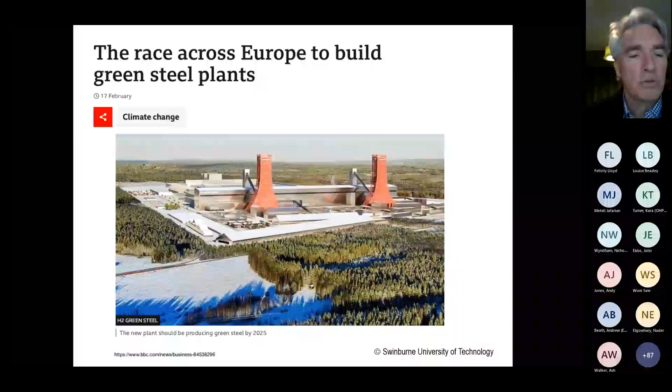So there's these new green steel plants, but then you see another story which came out a couple of weeks before that, about the Port Talbot Steelworks in South Wales. I've been to this plant a lot, I've lectured there, and I've done a little bit of research with the people at Port Talbot. This steel plant is an older plant. It's got, I'd say, fairly standard steelmaking technology that we're about to discuss, and basically the government wants them to go green.

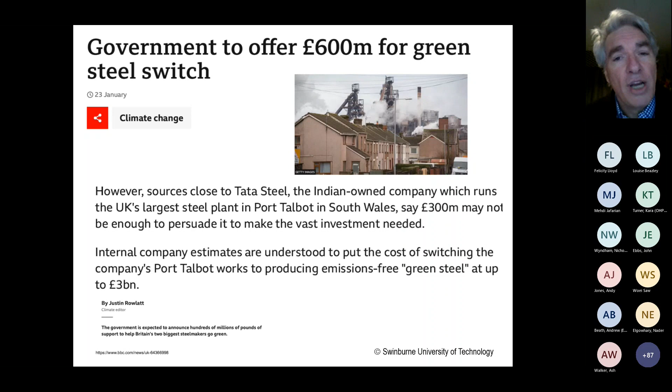The government's offering to put up initially £300 million, and then it looks like it's shifting to £600 million. But the management of the plant say it's going to cost £3 billion — I repeat that number because it's an extraordinary number, £3 billion — to be going green. There's obviously massive conversation going on about what's the future of the Port Talbot Steelworks. So in Sweden, we've got people building new greenfield sites, and in Wales, we've got people worried about an older plant surviving, and who's going to pay the costs and how they're going to move to some sort of green steel future.

Another very exciting announcement came just before Christmas — you might have missed it because you were getting ready for Christmas. Fortescue Metals announced they're getting together with Primetals and voestalpine, quite famous technology companies in the steel industry, to develop a fluidized bed process to make iron from Pilbara ores, the ores at Fortescue Metals' mines, and hydrogen. They're going to be building a pilot plant in Austria, and the intention is to establish whether this is a good technology for processing the ores in Western Australia. I'm sure every iron ore producer in Australia read that story with great interest — I certainly did. It's a very interesting and exciting investment. We're all going to be watching that with some interest.

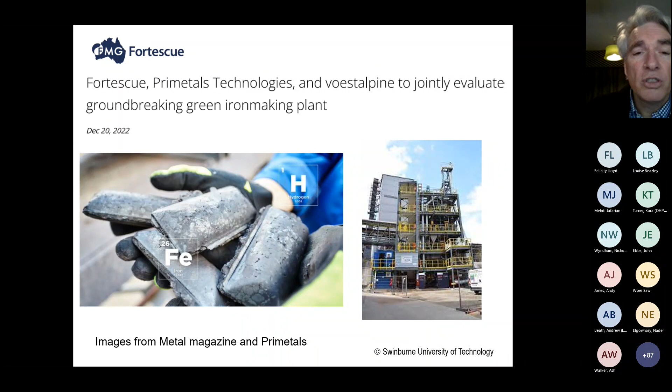Then this one is very recent — literally two weeks ago. This is a sort of disagreement, or at least some robust discussion, going on between BlueScope and the government, which made the media. Essentially what's going on is that BlueScope is planning to reline its blast furnace, which is technology based on coal and coke, and the government is trying to ramp up the rate of cutting emissions from large emitters like BlueScope by 4.9% each year until 2030. Basically, the managing director of BlueScope said this was actually threatening the viability of steelmaking in Australia. So, fairly serious words.

And I'm not going to walk away from that. I don't enjoy political discussions — I'm more a scientist and engineer — but I'm going to talk to you a bit about what the issues are there, about continuing with blast furnaces or moving to new technology, and some of the costs involved as well, which is obviously an important part of that debate. So I think first I'm going to go through a fair bit of technical detail, but I want to give a grand overview for a moment about what we're talking about here.

So you hear the term green steel. When you actually look into the details, it's really about green iron making largely, because what happens is we've discovered over a long period of time that the best way to make steel is to first make an impure form of iron from the iron ore — from a blast furnace it's called pig iron, but that's a detail. This impure material then goes into an operation where it's refined into steel. So essentially steelmaking is a two-step process: you make iron, and then you make steel.

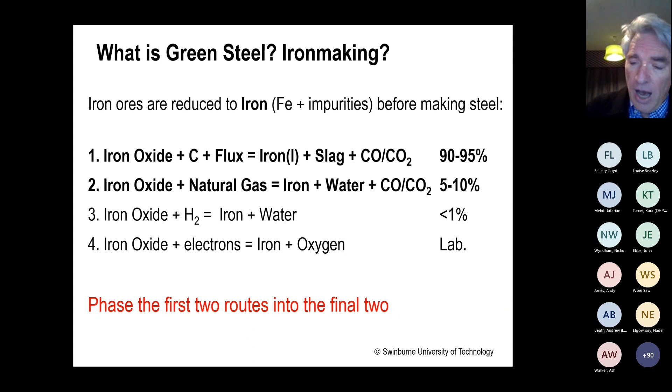What they're doing in HYBRIT, which is the process in Sweden, is getting the iron ore and bringing it together with hydrogen that's been made from renewable energy. From that, they make an impure form of iron called DRI - a solid material, not like a liquid like from the blast furnace. They then put it through an electric arc furnace, which is getting its energy from a green energy source, and then make different shapes and sizes.

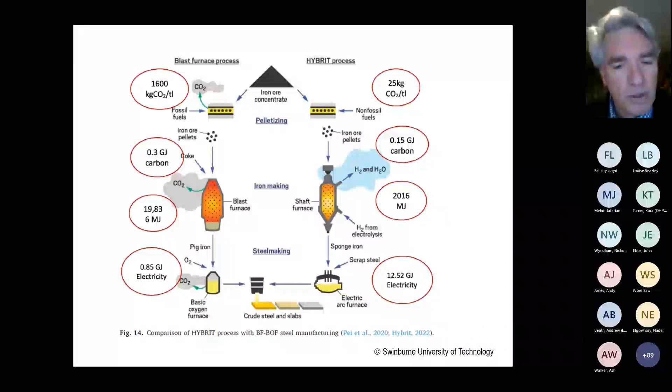So basically, what we're talking about is shifting from the left-hand side to the right-hand side. That's essentially what people are talking about. There are variations, but that's the essence of it, just to try and get that basic point across.

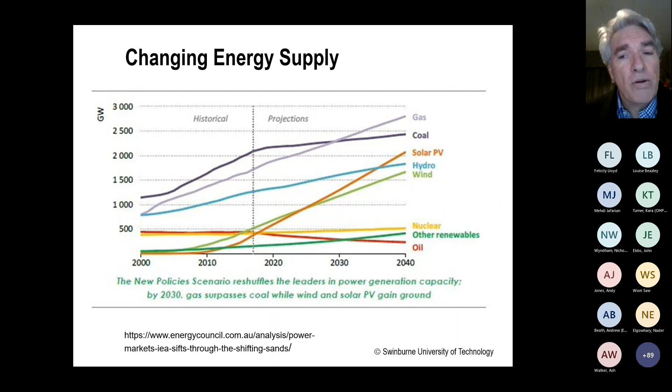Now, this has not been done in a vacuum - why are people doing this? Well, people are doing this because there's a general shift going on in our society towards renewable energy, and this is all about trying to affect climate change. There's a lot of debate in our country and all around the world about the pace of that and how long it will take us to get there. But it's undeniable that there is a general shift towards renewables, and that is also reflecting in heavy industry.

So people are looking at not just energy generation - they're now looking at all aspects of industry about which generates CO2. And when you look at this, you find that concrete, steel, and aluminium, which are three extraordinarily important parts of our infrastructure in the world, produce a significant proportion of the CO2 made by humanity. So what are we going to do to lower that down?

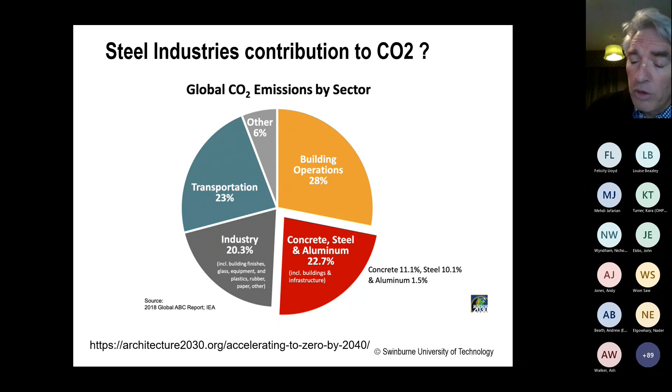They've done some calculations and they say, for us to be able to get to carbon neutral by 2050, we're going to have to reduce the CO2 from 1.8 tons of CO2 for steel down to about 0.2 — a 90% reduction. So if we want to achieve the goals of net zero by 2050 and avoid large temperature rises on the face of the Earth, we're going to have to cut the CO2 from steel by 90%.

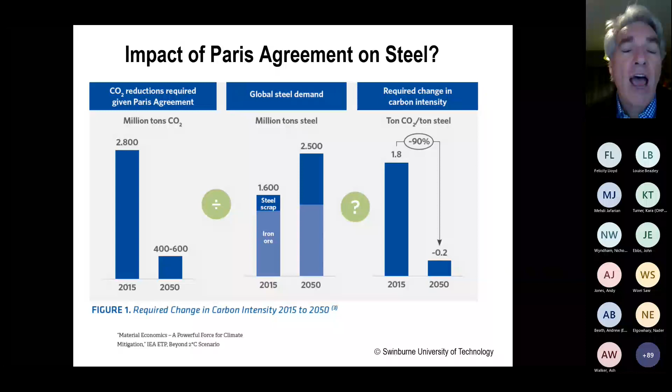Now, you might argue whether that number's right, but what we can all agree on is that's a very large change. This will not happen by incremental improvements. We will never achieve that by incremental improvements. We'll have to change our processes quite significantly. That's the major conclusion you reach from that.

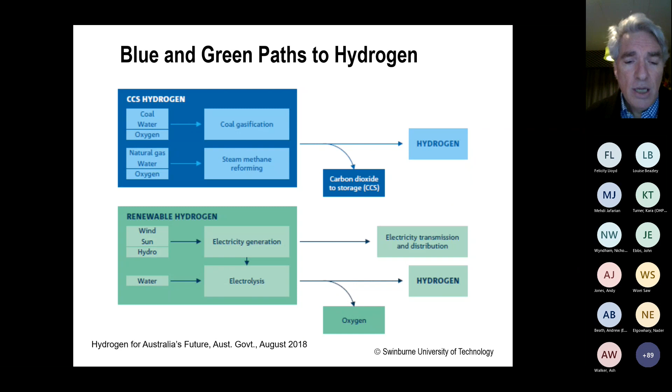At the same time, people have been proposing hydrogen as a route to not only make steel, but to generally be used in heavy industry. At the moment, hydrogen is dominated by production from hydrocarbons, and what we call blue hydrogen is where you capture the CO2, carbon capture technology, to make that hydrogen. What people are pushing for now very strongly is green hydrogen, which is where you generate the hydrogen from renewable energy, and your main products are basically hydrogen and oxygen.

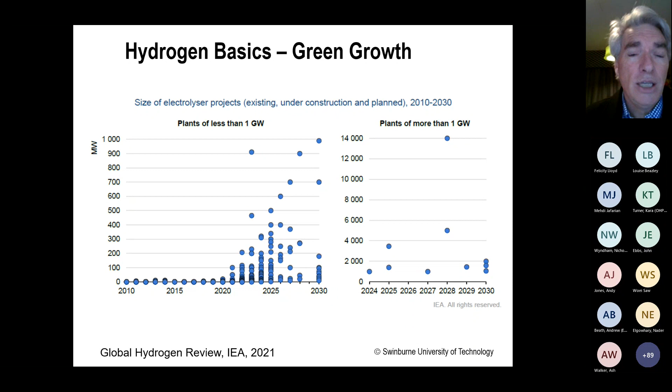There is a massive investment going on in Australia and around the world, because the current size of hydrogen electrolysis plants are really very small, but now there is investment in much larger plants. According to these sort of estimates from the International Energy Agency, we can expect really massive growth in hydrogen production over the next few years. Now, these diagrams I think are a little bit optimistic. I think some of you would be aware that there actually is quite a lot of supply chain issues with building these electrolysis plants. But I think what is not debatable is that we can expect a lot more hydrogen to be available in the Western world and in Australia over the next 5 to 10 years.

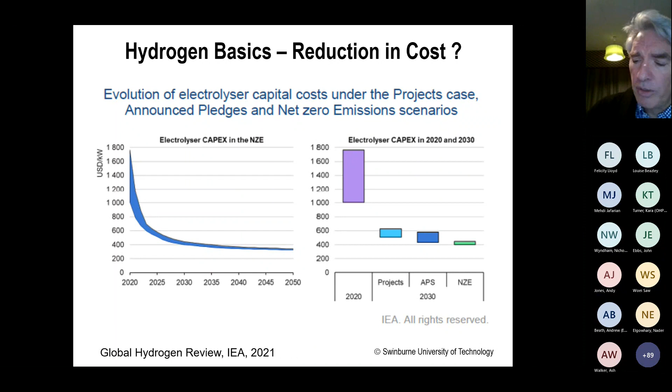I've done my own calculations on that, and to me that looks a little bit pessimistic. But you should know that at the moment a lot of hydrogen in the world is selling around about $4.50 US per kilo. So for us to get the cost down, we need to really dramatically reduce the cost of green hydrogen. There are some people who believe that we can get under $2 and even $1, and they think that will happen in the next few years — that remains to be seen.

I think the thing that is beyond argument is that basically nobody believes that introducing hydrogen will make steel cheaper. Everybody thinks it'll make steel more expensive. Now, that's a really important point because, say for example, you're operating a steel plant in Australia, and you go early with introducing hydrogen — you do it right now. Then that means you'll be producing steel that is more expensive than your direct competitors in Asia. So that's a really big issue.

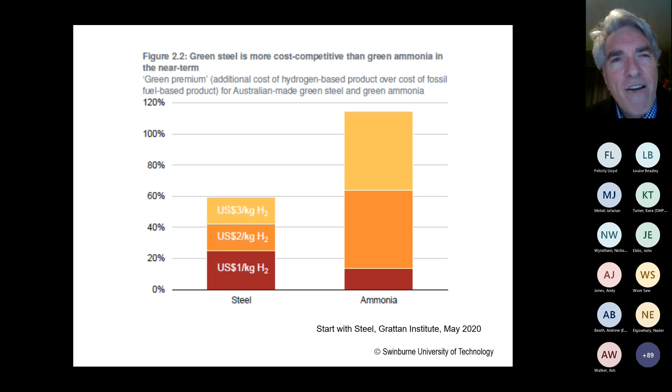Now, in Europe, they're saying that they're going to protect their steel industry against that kind of issue. So they're pushing strongly for the introduction of hydrogen, but they're also offering to protect it. So this is a very big political, social, economic issue in Australia. So the big picture is that steelmaking contributes a significant amount of the world's CO2. Some people say 7%, other people say as high as 11. I don't know which one's correct, but somewhere in that range.

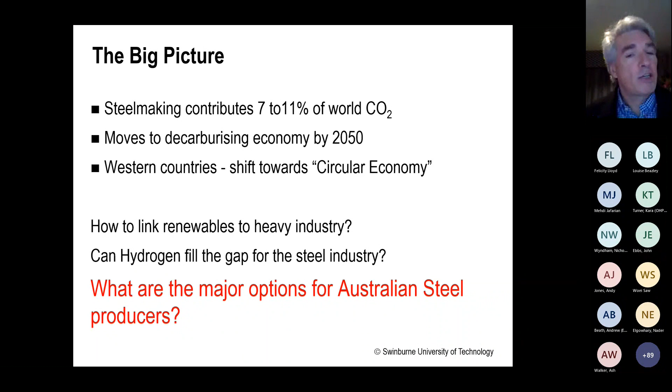And there's this big shift towards decarbonisation, and there's also a general shift towards the concept of a circular economy, where we are living off what we are recycling rather than constantly making new things. So there's a big challenge about linking renewables to heavy industry, and people thinking that hydrogen is the answer. It's one of the answers. And my question is, what are the major options for Australian steelmakers?

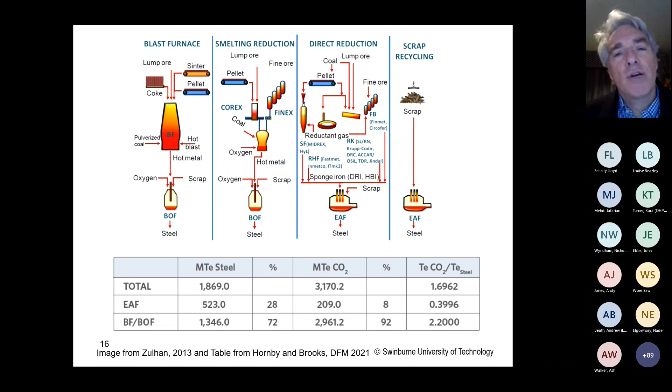So Australia produces 5.5 million tonnes of steel. That amazes everybody in the steel world, given our tremendous resources. That's a very small number for a country with outstanding renewable energy resources, outstanding coal, outstanding natural gas, and outstanding ore. But that's what we produce.

We currently have 2 plants using the blast furnace, one in Port Kembla and another in Whyalla. One of the most important things about the Whyalla one is that it's right next door to a significant magnetite iron ore resource, which, as you'll see, is an important point.

The 2 scrap melting plants, the Sydney one and the Melbourne one, have been designed around the scrap supply of those cities. So basically, when you have enough people producing scrap, you can justify economically building an electric arc furnace. I think it's inevitable that we'll have an electric arc furnace in and around Brisbane, or somewhere between the New South Wales coast and the Queensland area, because there's such a large population there that we'll inevitably be able to justify one.

So these are the 4 major plants. There are a couple of other specialty plants in Australia, but their production is quite minor compared to these 4 plants I just described.

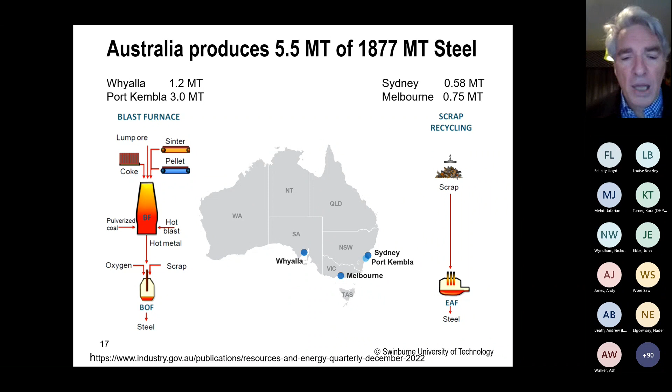We are maybe small in steel, but we're huge in iron ore. We're not only one of the world's largest exporters, we're also one of the world's largest reserves. So this debate we're having is not just important to our steel producers, it's also important to the people who are exporting iron ore. What Australia does in this area is of great interest around the world.

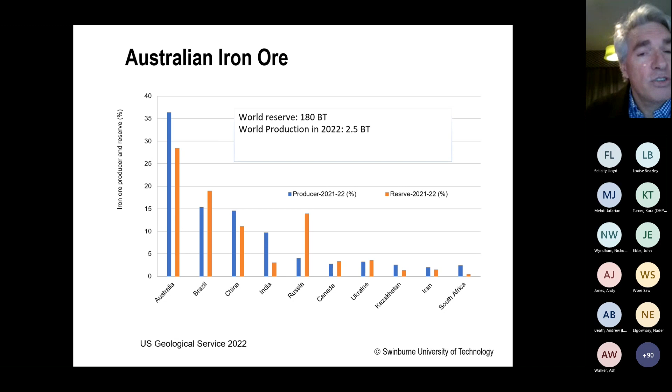One thing to realize about ore is that ore grade around the world is going down. Years ago, you could find ores above 65, 66, 67% iron, which are very rich ores. But now in Australia, for example, a lot of our ores are more between 62 down to 58, 57% iron. This is going to have a big impact on these different choices. So we're trying to bring hydrogen in at the same time that we are having declining ore grades, which is an important point.

The ores in Australia that we mainly export at the moment are mixtures of hematite and goethite, particularly in the Pilbara. But magnetite ores are also becoming important.

Historically, magnetite ores have been a little bit expensive to process. But one attractive thing about magnetite ores is their magnetic quality of Fe3O4 - that's why it's called magnetite - which means you can upgrade it using magnetic separation, so you can get much richer ores even if you start with a lean ore.

All the gangue minerals inside these ores add significantly to the cost of making iron and steel. So basically, a high gangue content means extra cost, as you will see as we discuss it.

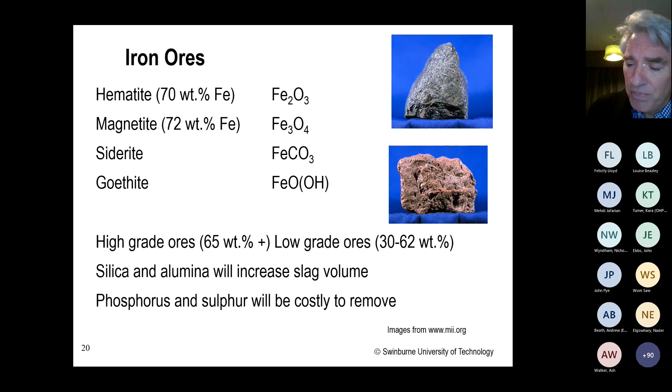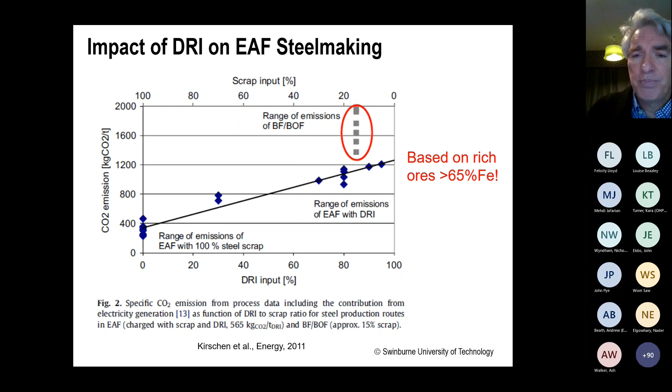We won't talk much about scrap today, but just something to realise is we don't have enough scrap in the world to supply our world steel needs. A lot of the scrap coming into the world is obsolete scrap, which has a lot of residues and troublesome impurities in it, making it actually very difficult to produce high quality steel. So it's unlikely we can answer our steel issues just by relying on scrap.

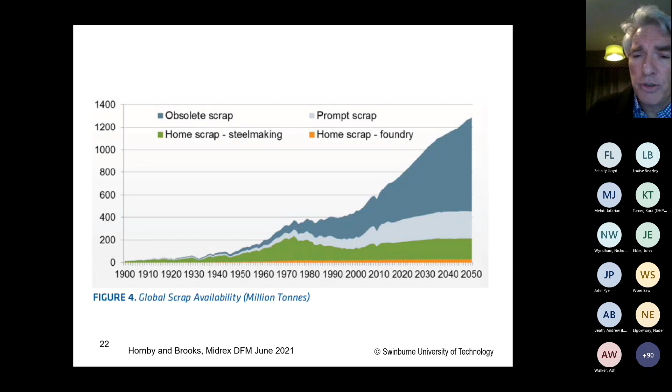We would really need a revolution in our scrap sorting technology. So basically, ores are drifting downwards in quality. The DRI is currently made from high-grade ores - that's what we currently do.

And it's not really clear exactly how the expanded DRI production, which is what we're expecting with hydrogen, will play out. Scrap quality is a major obstacle and an ongoing issue. And green hydrogen, as we've already discussed, is currently costly, and we're hoping it will go down in cost, but that still has to emerge.

So what are the major choices? I'm going to talk through each of these. One obvious one is electric arc furnaces switching to green energy. If we switch straight away to green energy on our Sydney and Melbourne plants, we will have a significant impact on the carbon footprint of those plants. So that's an obvious thing to do, and I believe it will happen.

The other option is for our blast furnace BOF operators to switch to a DRI EAF route, or to find a way of bringing more hydrogen into their blast furnace and more scrap into their BOF. Currently at Port Kembla, BlueScope is doing a lot of work to get more scrap into their BOF, and I think they're quite innovative in that area at the moment. That's a net benefit because it means you don't need to produce as much iron, which means you don't need to make so much CO2 - quite an interesting development.

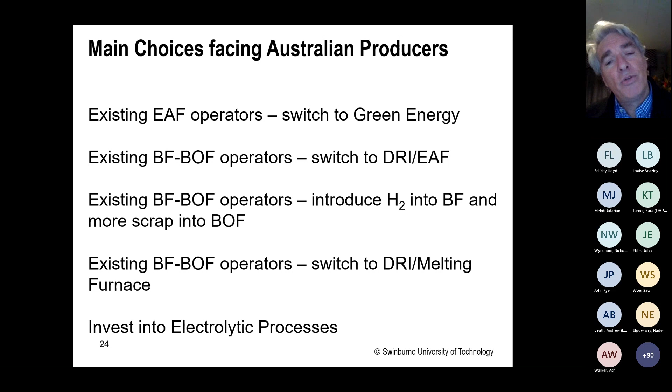Another option is, of course, to switch to a different sort of furnace designed to remove all the gangue - that's another option people are looking at. And yet another option is the one I mentioned before, electrolytic processes, which I'll briefly talk about.

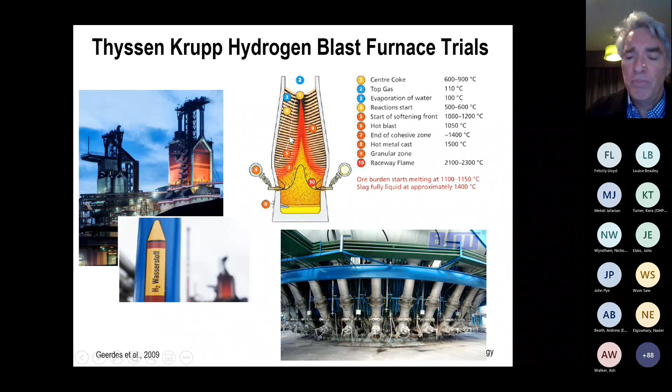And in Japan, they've been doing a lot of work over the last decade to try and find cheap forms of hydrogen from various syngases to replace the carbon coming in. They've also done work trying to get clever with the heat distribution in the blast furnace.

They're aiming to achieve a 30% CO2 reduction, which is quite large, but still probably a long way short of what's required to achieve the goals of 2050.

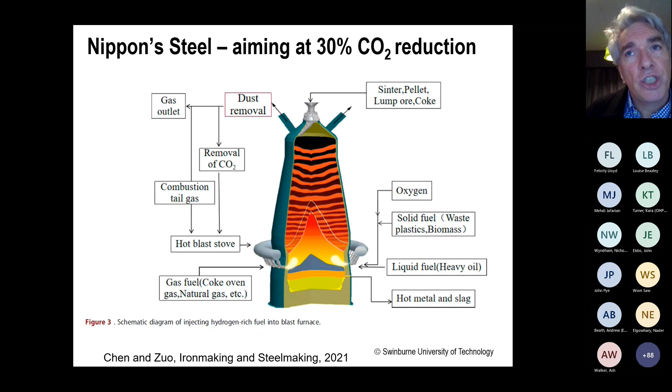Just a little bit about the blast furnace. The carbon that comes in the form of coke, shown in these dark lines here, serves many purposes. First, it provides a physical structure inside the furnace to distribute the gases. So the coke is providing an important structural role, but it's also ensuring you have enough heat down near the bottom so you can melt the metal and slag and collect them at the bottom.

One of the concerns of bringing hydrogen in at number 6 through the tuyere line is that the reactions involving hydrogen are endothermic - that is, they take heat in, not put heat out. So there's a risk of making the furnace too cool in this area near the tuyere area, and there's been a lot of calculations and some measurements done on that. This is a real concern about operating a blast furnace with a lot of hydrogen.

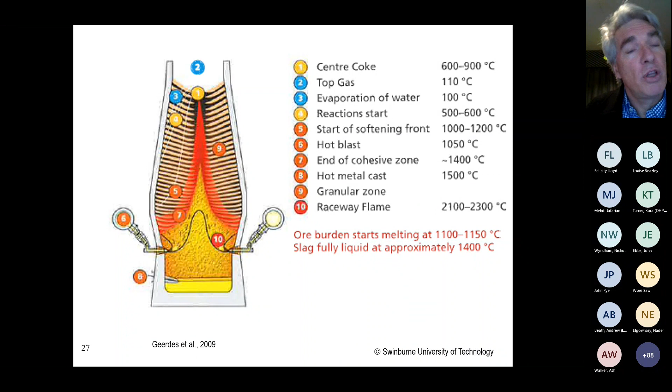As it stands, people are saying they can expect somewhere between 8 to 30% reduction in CO2, so it's not clear whether you can go above 30% using hydrogen injected through the tuyeres. Some people think you can displace between 14 to 32 kilograms of coke from the input per ton of hot metal. So this is an area still undergoing research, but at the moment there's a little bit of pessimism that we can push much beyond 30%. That's an area which I think still has room for innovation.

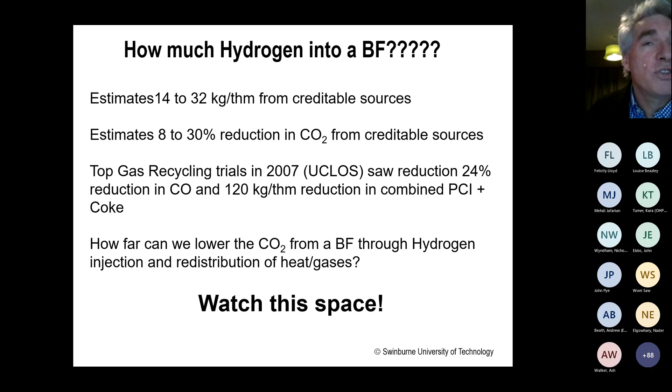So I would say don't write off the blast furnace yet, but watch this space because I think there is still space to innovate there. But at the moment, it doesn't look like we can get as much hydrogen into a blast furnace as is required to meet our goals.

Now, the other people who have been developing iron-making processes are Midrex. They're one of the DRI producers, and they've been running their DRI processes now for 30, 40 years. These are quite commercial, successful units. They bring in natural gas, and the natural gas is turned into CO and hydrogen. It then goes into a shaft, and the gases go back and are recycled around a reformer route. This then produces a solid product, which is shipped or put directly into a furnace.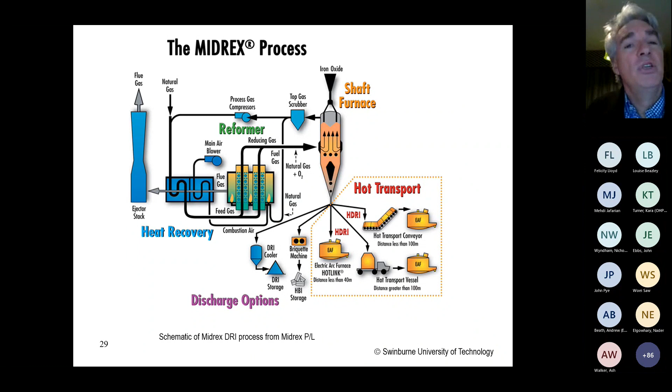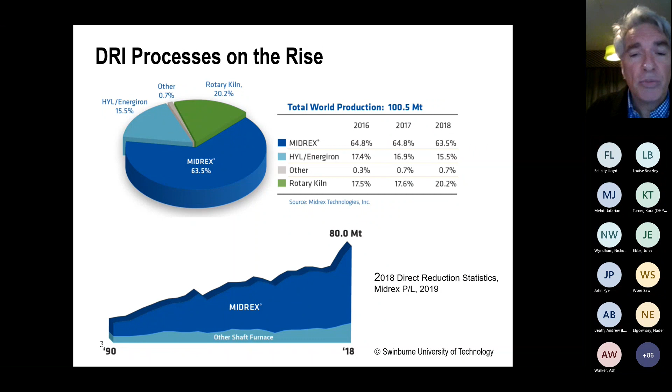The Swedish initiative Hybrit is basically using a HYL furnace and replacing it with 100% hydrogen, then putting it into an electric arc furnace supplied from a green energy source. Now, a very important thing to remember is they're using very rich iron ore. That's one of the reasons this route looks viable in the Swedish context - because of the availability of rich ores. One interesting aspect is that the hydrogen they use is stored in caves - they store the hydrogen in salt caves near the plant.

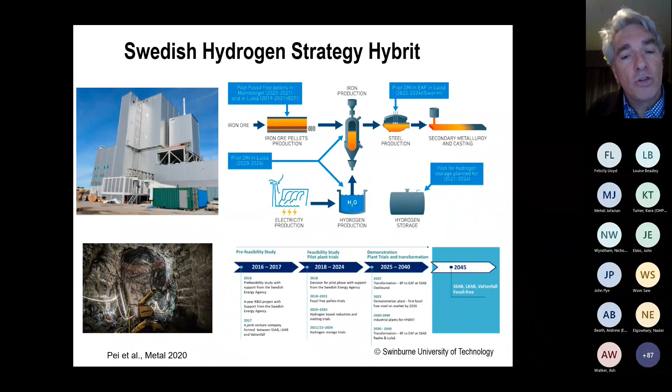This is at the moment a very small scale plant. It's really barely at the pilot plant scale, but they're hoping to build this into a much larger plant as laid out in this diagram here.

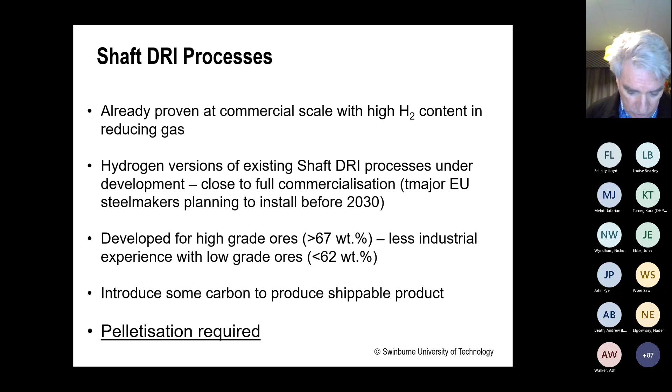So these shaft DRI processes have been already proven at commercial scale with high hydrogen content, and they're pretty close to full commercialization with 100% hydrogen. There's a number of large-scale investments going on at the moment doing exactly that. I know of several European steelmakers who plan to install a hydrogen shaft DRI process before 2030.

What you need to keep in mind is that this has largely been developed for high-grade ores, and there's actually limited public data on how they operate with low-grade ores. I am aware that Midrex, and probably HYL as well, have operated with lower grade ores, but there's not a lot of data about exactly how they perform. One thing important to realize about these processes is that pelletization is required.

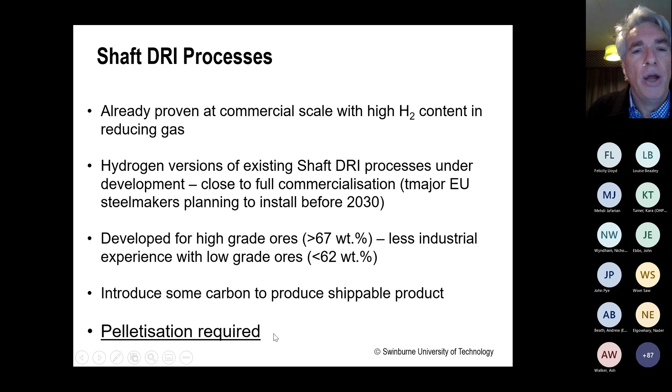Now, the other approach is using fluidized beds, in a process called Circored. This has a two-stage fluidized bed process, and it's actually been done at commercial scale, operated some 15, 20 years ago in the West Indies. They produced iron with hydrogen and shipped it to steelmaking plants around America. So we've already done hydrogen iron making and EAF steelmaking at commercial scale.

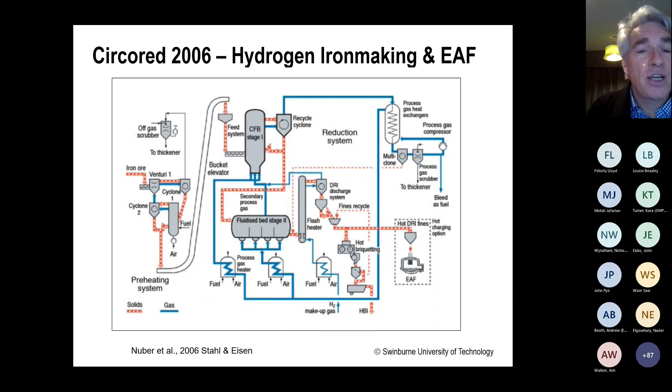And they are now selling another version of this process to anybody who's interested. Primetals have developed this, which our friends at Fortescue Metals have invested in. They have a staged fluidized bed process using hydrogen, tested at pilot plant scale in Austria, building on other fluidized bed technology that Primetals, POSCO and other companies have been involved in. This process is what we're going to see built at pilot, demonstration level, with help from FMG for West Australian ore. So this will be fascinating to see how it performs.

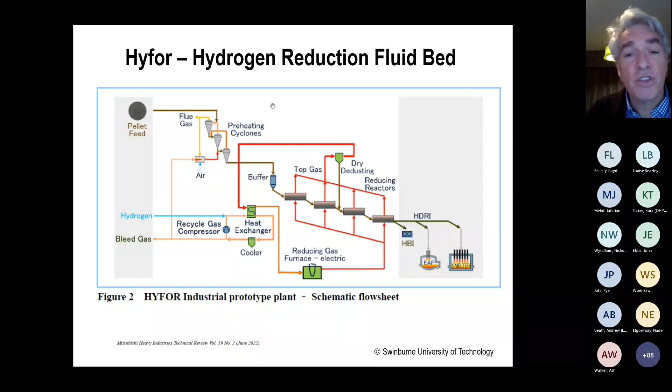These fluidized bed processes are building on existing fluidized bed technologies. Some of the issues are sticking of ores, since ores tend to stick when they get hot, which isn't helpful to a fluidized bed. Recent work shows that if you control the temperature very carefully, you can avoid that problem. But that's one of the big issues to be tested in this joint venture between Fortescue Metals, Primetals and voestalpine. The other thing is how many stages you need. The number of stages affects the level of metallization of the product, but also affects the capital cost. One of the most attractive aspects of these processes is you don't need pelletization.

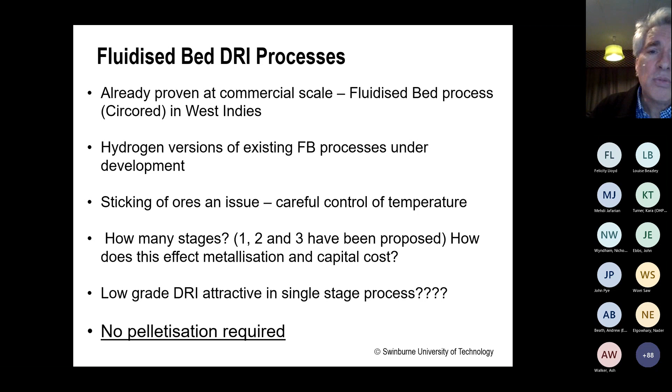In Australia, there's an exciting development going on. It's not a fluidized bed and it's not a shaft, it's basically what we'd call a flash smelting process, developed by Calix. I should reveal that I'm quite heavily involved with this, so I'm not a completely objective observer. They've built this pilot plant in Bacchus Marsh, based on using electrical heating and hydrogen only as the reductant, to minimize the cost of using hydrogen. They drop iron ore fines down a shaft, react it with hydrogen, and make a DRI. They're currently testing this pilot plant with a range of different ores, and myself and Swinburne University are heavily involved with that.

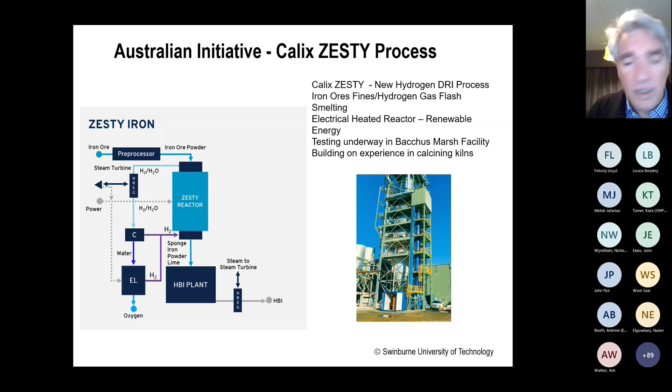So the big picture is that, I've already gone through that, excuse me, that's a repeat.

Now, let's get down to the business of what to do with these high-gangue ores, which I've been promising to talk about. High-gangue ores are more of a problem, for example, for BlueScope, because our friends in Whyalla are near a magnetite deposit which they can realistically expect to upgrade. The people in BlueScope are trading ores from around the country, probably buying a lot of ores from the Pilbara, I'd be guessing, I don't know exactly.

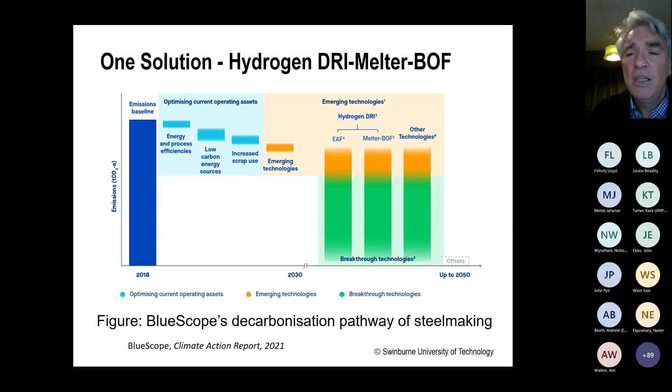So they're contemplating an intermediate process where you melt the iron, the DRI, to get rid of the slag. Some people call this a melter, some call it a smelter - there's a variety of names, but I'll give you an idea what it looks like. This is a recent presentation from SMS, where they're planning to install these furnaces in steel plants. Basically you'd have a shaft process, like a Midrex or HYL, and its product would go into these big rectangular arc furnaces, which would produce iron that then goes off to steelmaking. So what they're really doing is replacing the blast furnace with two furnaces, because the shaft is really the top part of the blast furnace, and these electrically heated furnaces are really replacing the melting. So basically this is a blast furnace split into two, that's really what it is. And the energy for the melting is coming from electricity.

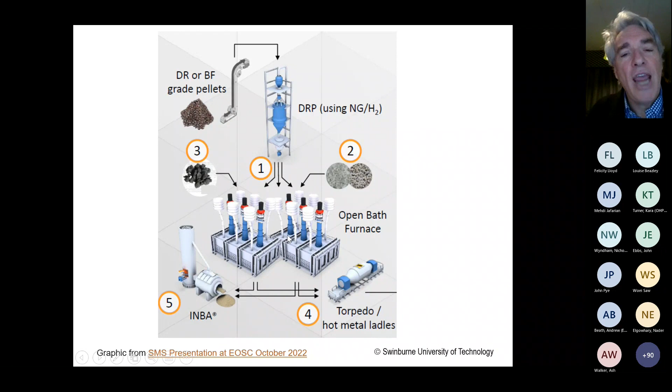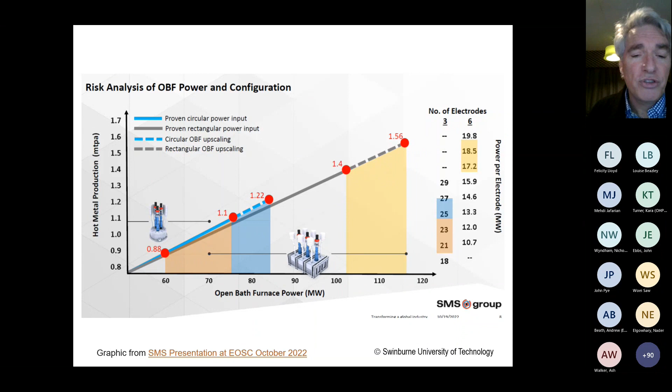These furnaces already exist, a number of them already exist in the world, and this diagram shows what scale they're up to. Basically the scale they've been building to is still some way short of what you'd probably want from a steel plant. So there's a whole lot of development to go to try to get these melting or smelting furnaces, depending how you see it, up to the scale that people are interested in.

Now, when people do calculations about how much CO2 you could reduce, they basically show that these processes can dramatically reduce the CO2 compared to the blast furnace.

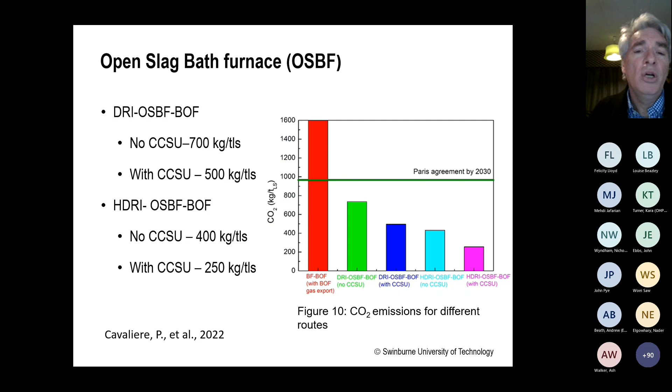They've looked here at the options with carbon capture, without carbon capture. Now, carbon capture is a whole big topic in itself, but basically these melting furnaces can achieve the kind of drops in CO2 that people are looking for, particularly by 2030 or 2040.

This is a diagram that's most interesting. It was produced by Primetals, and what it's showing is something that's very important to Australia. I'm actually, at the moment, reconstructing a version of this diagram for the Australian situation through the HILT CRC.

What this is looking at is the cost it takes to process an ore compared for the grade of iron. So a lot of Australian iron ores are at this left-hand side of the diagram. And in Sweden, they've got ores at the right-hand side of the diagram.

What it's showing is that this smelter or melter, depending what you call it, is the cheaper option at low-grade ores compared to the electric arc furnace.

So basically this diagram is saying if you have a lean ore, you probably want to have a smelter with a BOF, and for a high-grade ore, you probably want an EAF.

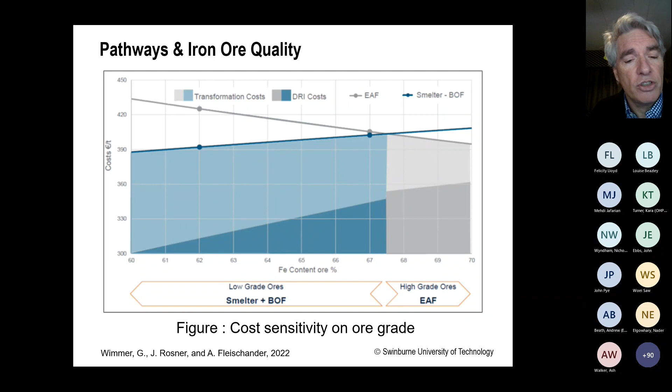So this is a generic diagram. As I said, I'm trying to understand this for Australian conditions through a project that's funded through the HILT CRC.

So here's a few questions for iron ore producers to consider.

How does the cost of extra mineral processing versus the melting or smelting of DRI compare? Should we put our money into extra mineral processing, or should we put our money into building a melter?

That's a dilemma that I'm sure our friends at BlueScope and InfraBuild and Liberty are thinking through, as are the iron ore producers.

Can we convert the hematite goethite into magnetite, so make it magnetic, and then use magnetic separation to make the ore rich? Is that a viable idea?

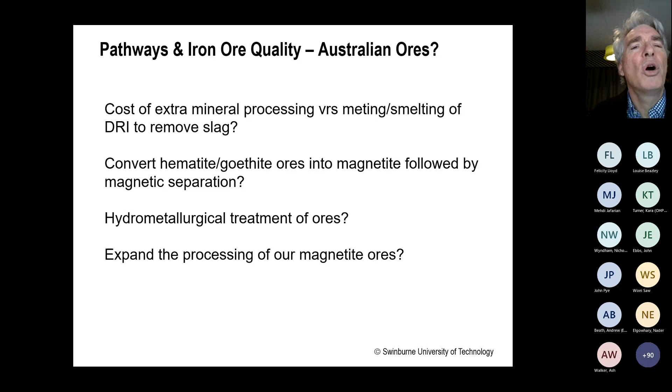Hydrometallurgical treatment of ores is another idea I've heard people talking about. Should we just be expanding the processing of our magnetite ores? This is a topic of a whole separate talk, but just to give you some of the issues being discussed at the moment.

Molten oxide electrolysis, which I've run out of time to talk about in any depth, is a very low TRL technology at the moment. Basically, the concept is that we get the iron ore into an electrolyte, we apply an anode and a cathode, and we produce metal as per the aluminium process.

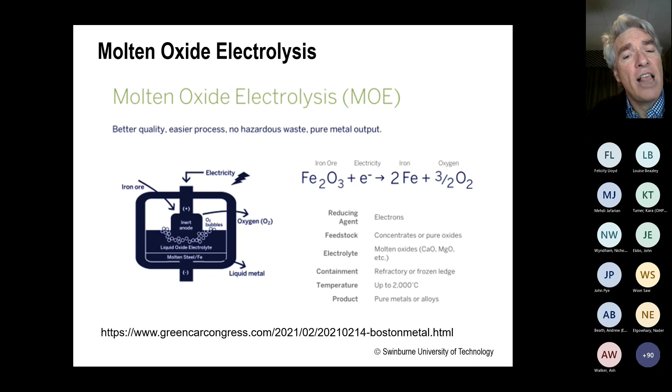It's a basic idea. There's only been limited development of the anode materials, because very quickly you realize for this to work, you need to have a successful anode. There has been some very nice work done at MIT, and this work continues, but at the moment it's still very early days.

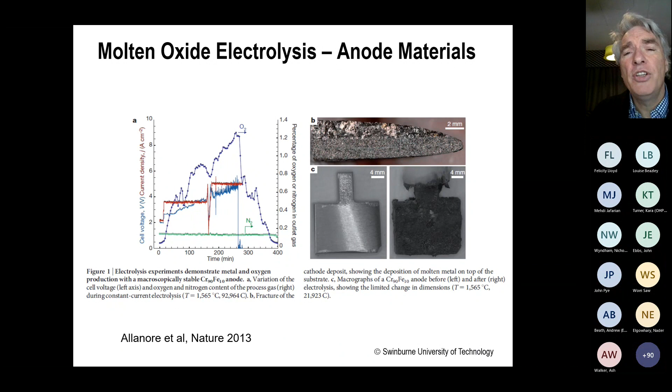One of the next steps being produced here in America is Boston Metal, which is currently looking to build a demonstration plant in '24-'25. There are lots of questions about productivity and capital, and lots of questions about anode materials.

One of my PhD students, Matthew Humbert, gave a talk at the recent conference in Newcastle, and he went through all those issues in some detail, which I can't do now.

I'm sure he can provide his slides if you ask him politely. But it is a big issue, both the anode materials, the productivity and capital. So watch this space, this is a technology that's developing.

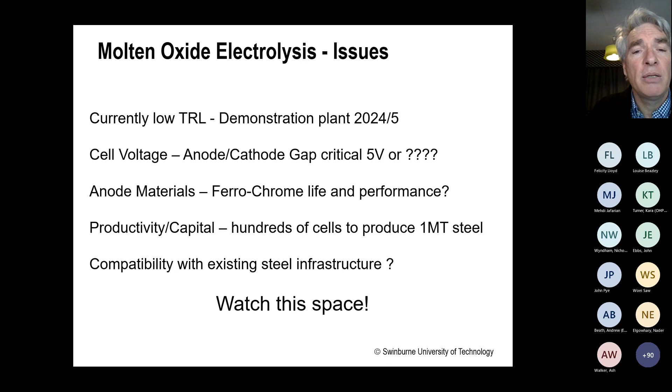So what are the decarbonisation options for Australian steel? It's taken me a long time to get to this slide. The first obvious thing is providing green electricity to our scrap melting plants.

That's the first simple, obvious step that we should do. I think that's a no-brainer that is something that we should do. I think we will be considering - and I mean us, I'm not going to tell BlueScope how to do their business -

but I'm sure BlueScope are considering some sort of hydrogen DRI melter process at Port Kembla to deal with a wide range of ores. In fact, I know they're thinking about that, but they don't tell us - it's obvious that they should.

The other one is in Whyalla, since they have access to magnetite, they can probably use a hydrogen DRI to an EAF to replace the blast furnace.

So what I'm expecting to happen is that the blast furnace will eventually be replaced in Port Kembla with some sort of DRI melting system, and I'm expecting in Whyalla that it'll be replaced by a hydrogen DRI with an EAF.

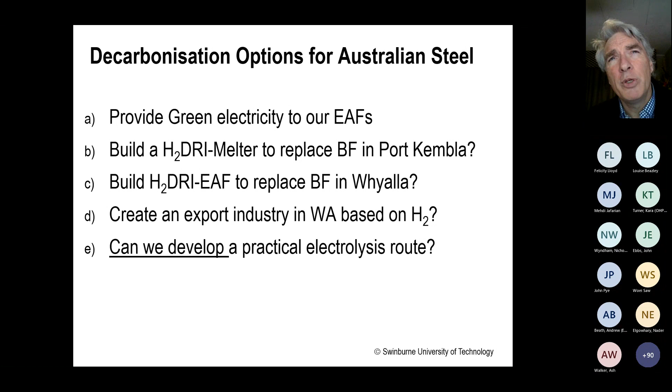We could also create an export industry in West Australia based on making iron using these processes. Dave Trotter recently gave a talk in this webinar series about that, and I think that's an open topic. The electrolysis processes are a long way from commercial reality. Why can't Australia develop this? Why are we waiting for people overseas to do this? I think we could do it quite easily.

Now I've got some broader issues I'd like to raise, in the political economic sphere. First, who's going to make the investment to convert these plants to green? How much will be private money versus public money, or at least public support? I think that's a very big question, and that's at the heart of the recent debate between BlueScope and the government. Do we need to protect our steel industry in this transition? If hydrogen steel making is currently more expensive, and could be quite a bit more expensive, how are they going to survive? I think this needs to be a mature debate.

I haven't talked about carbon capture, storage and utilisation. I think it's a really interesting question because it's another option. It's an economic question and a political question. Where would it be economic? Which part of Australia would it be economic? But also, is it got any political viability? Is it ever really going to get up? It seems that carbon capture technology has not been politically popular in the Western world. So I do wonder whether you can get both political and economic agreement there.